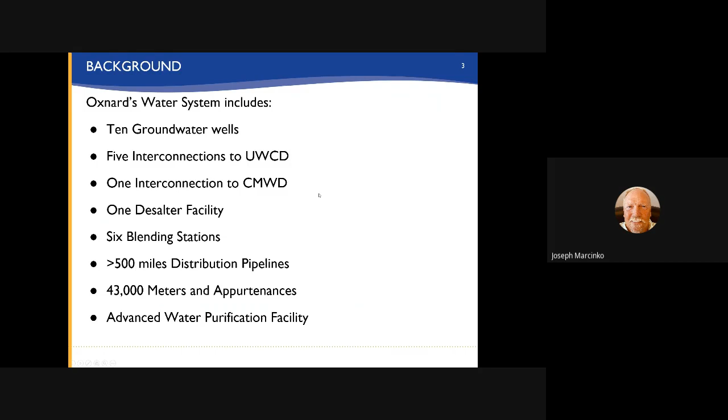Oxnard's potable water sources consist of Calleguas Municipal Water, imported surface water, City of Oxnard's own allocation to groundwater through the Fox Canyon Groundwater Management Agency, and groundwater purchase from United Water Conservation District. The Calleguas amount is about 30 to 40% of our annual supply. The city wells are about 20 to 30%, and United Water Conservation District consists of about 30 to 40% of our supply.

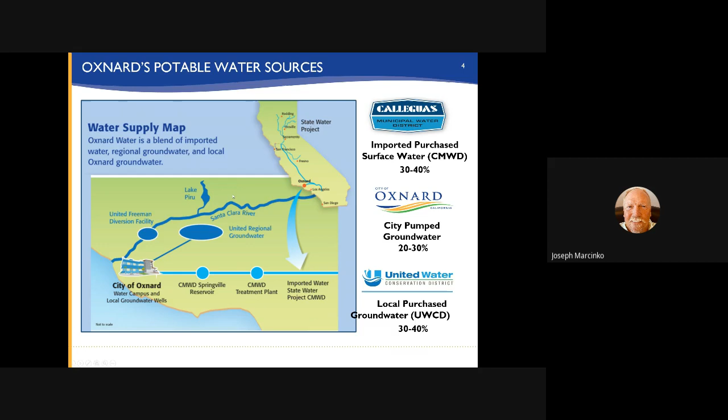Background: The Public Works and Transportation Committee in 2021 requested that the Public Works Department provide reports regarding water-related topics: the Water Division virtual tour, water sources and drought updates, cost of water, urban water management plan, and recycled water. This report provides a cost of service analysis, which is a component of Oxnard's future long-term plans for water.

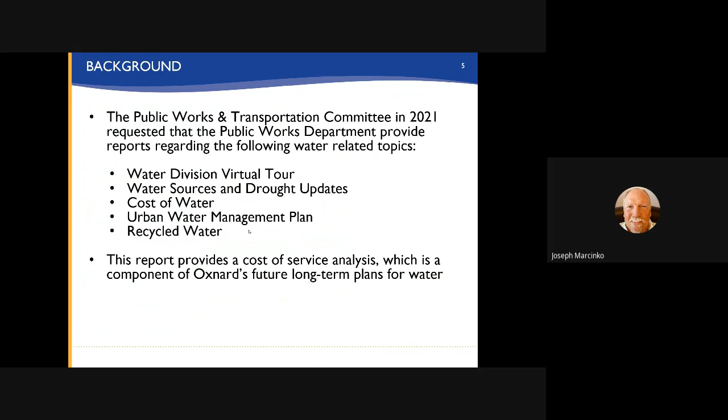Discussion: The water operating budget is funded from ratepayers' fees. Water revenues cover operations, maintenance, repairs, debt service, capital improvements, and cash reserves.

Budget forecast for fiscal year 2022 to 2023: the total revenues forecast are $68,127,319. The total expenditures are estimated to be very close to that, $68,008,769, leaving a net revenue of $118,550.

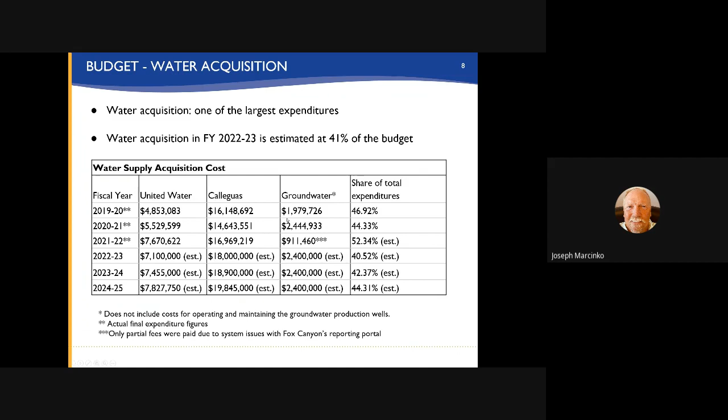The budget also includes electrical costs, which is a significant portion of our budget, and just like everything else, our electrical costs are estimated to go up. They were pretty consistent from fiscal years 2017 through 2021, but now they're starting to go up, with an increase estimated at about 14.6 cents per kilowatt hour for fiscal years 2021 and 2022.

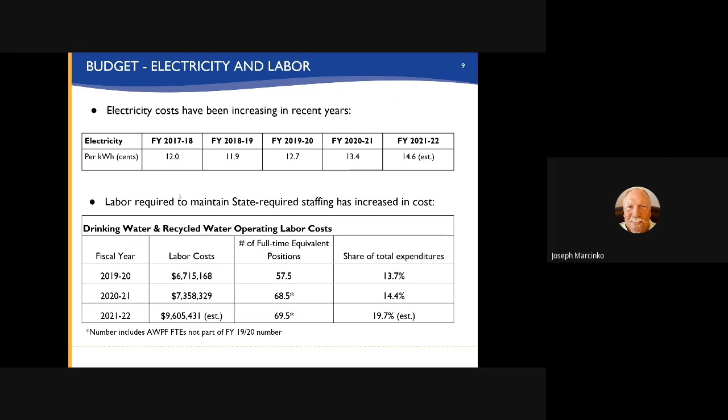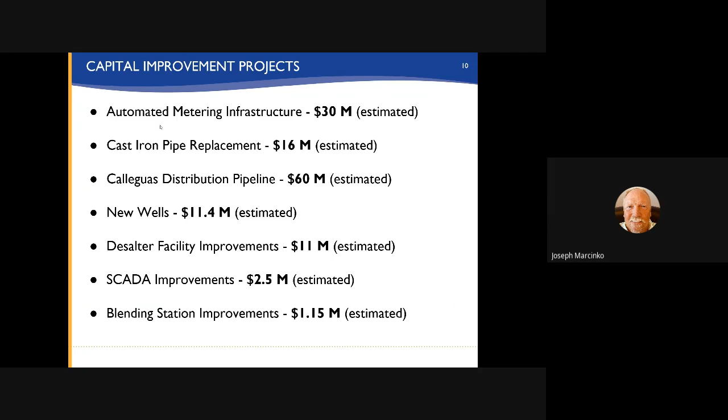New wells are estimated at $11.4 million. Desalter facility improvements are estimated at $11 million. SCADA improvements at $2.5 million. And lastly, blending station improvements at about $1.2 million.

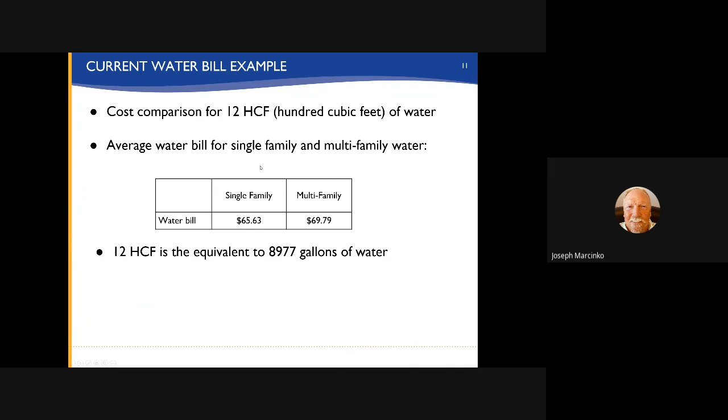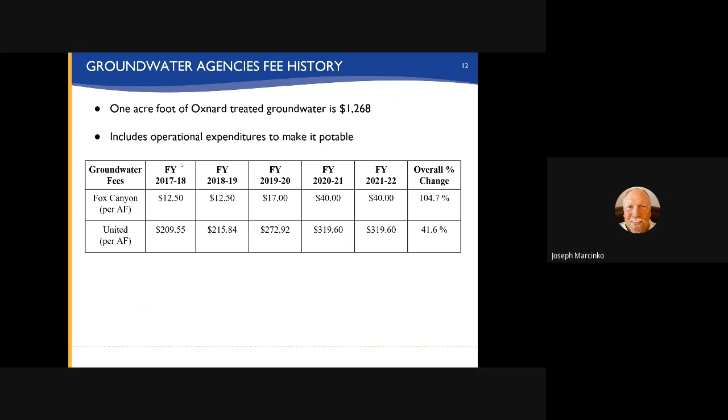The groundwater agency fee history shows groundwater agency fees are going up as well. One acre foot of Oxnard's treated groundwater is $1,268, which includes operational expenditures to make it potable. This table shows the groundwater fees from Fox Canyon and United Water Conservation District over fiscal years 2017 through 2022, and you can see how those prices have gone up significantly — that's one of our considerations in our operational expenditures.

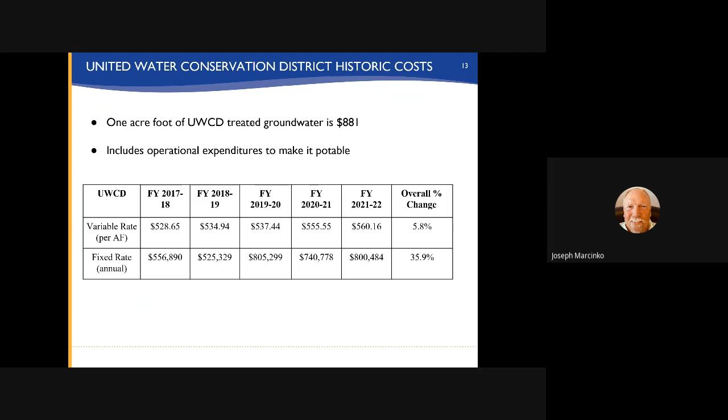United Water Conservation District's historic costs: 1 acre foot is approximately $881, including operational expenditures to make it potable. The table below again shows fiscal years 2017 through 2022 and the different charges with corresponding costs, which have also gone up significantly — another very important consideration that affects our cost of serving water significantly.

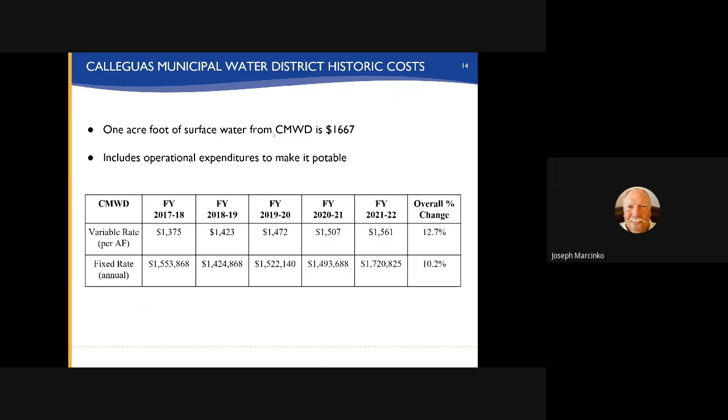Lastly, here we have Calleguas Municipal Water District historical costs. One acre foot of surface water from Calleguas Municipal Water District is $1,667, which includes operational expenditures to make it potable. This table again shows fiscal years 2017 through 2022, and you can see how those costs have increased steadily as well.

This is a table for water supply and demand projections. You can see that from 2025 through the estimated years of 2045, our estimated water sales and use is expected to go up, and we have to make sure we secure additional water to meet the needs we estimate we're going to have.

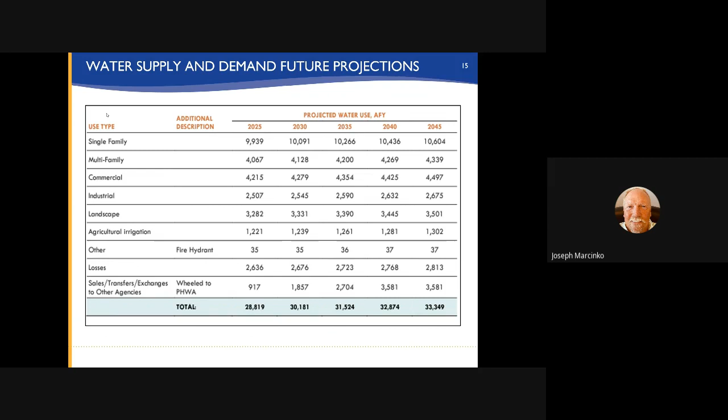This is a graph that shows the proportional makeup of the water supply and the estimations for the future, from the years 2014 all the way up to the estimated years of 2042. You can see how the different proportions have changed with the three sources: city groundwater, United groundwater, and Calleguas.

But that's not going to meet our future demands, so we need to factor in recycled water, using it for ASR, as well as taking recycled water that we've sold to the agricultural community, and we get credits for that, using those credits in future years in order to meet that demand.

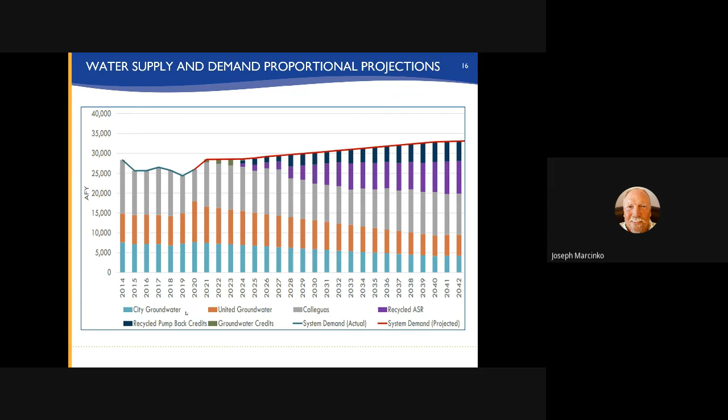This table shows Oxnard's groundwater basin's historic levels. You can see they're not in a good way. The 80,000 acre foot line is kind of the safe yield for the basin. From October 2013 for the most part, all the way through the present time, it's been in overdraft, which is what they call it when they're under that safe yield.

They had one spike in the 2018-2019 year, a good rain year then, but you can see this prolonged drought has significantly affected the groundwater levels in the area.

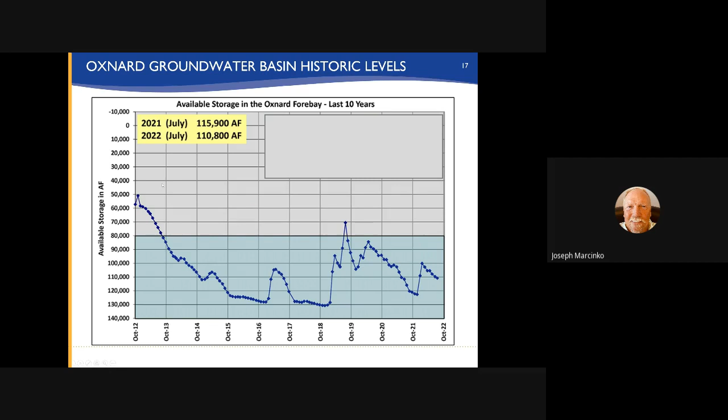For the Calleguas supply, as you probably know from all of our meetings and drought restrictions, available water supplies all around the state in California are bad. This slide represents the different reservoirs across the State Water Project and their current levels as of September 2022, and you can see that they're all very low as well.

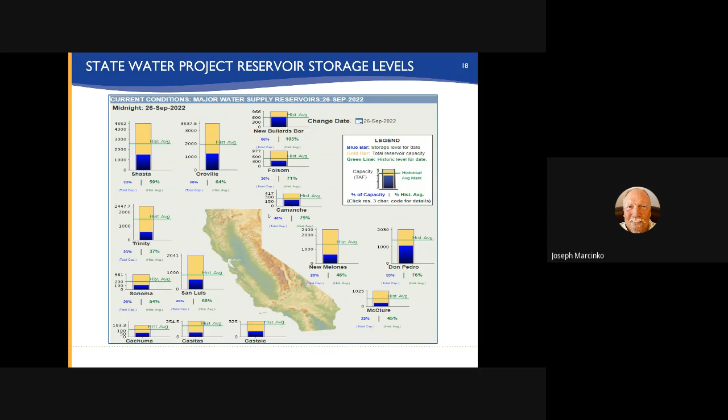So in order to look at our future, we ran a SWOT analysis. A SWOT analysis is strengths, weaknesses, opportunities, and threats. This table lists those different areas that are significant things we need to consider for future operations. Some of the strengths we have, especially now, is that we're very fortunate to have multiple water sources.

As one water source gets depleted, having multiple water sources is like having different financial accounts and different amounts of money in different banks, so you can pull out money if one investment isn't doing so well. We also have the GREAT program, taking recycled water and working towards making it potable in the future. We have a robust capital improvements program for replacing our infrastructure, an urban water management plan for managing water in the future, as well as a water shortage contingency plan for critical shortage levels.

Some of our weaknesses are the regulations in water, and the requirements constantly coming out. The regulatory timelines associated with those are usually very short.

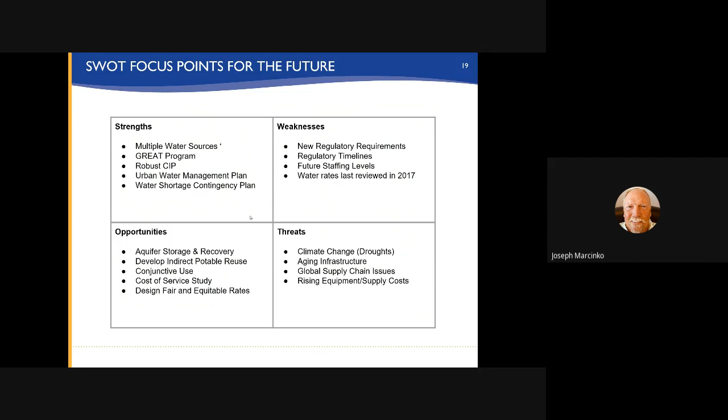There are global supply chain issues and rising equipment costs and supply costs that are a byproduct of the COVID-19 epidemic as well.

In conclusion, there are a lot of outside factors that continue to increase costs to provide water. However, Oxnard's Water Division is always committed to delivering safe and reliable water 24 hours a day and 365 days a year, implementing our 5-year capital improvement program so that we can maintain and replace our aging infrastructure, and utilizing recycled water as an additional water source in the future.

We're working hard to get that all set up. We're looking closely at our water budget to make sure it's properly funded and efficiently utilized. We're preparing to handle the effects of climate change and those challenges, and we're looking at securing a reliable and well-maintained water system and maintaining public health and safety for future generations.

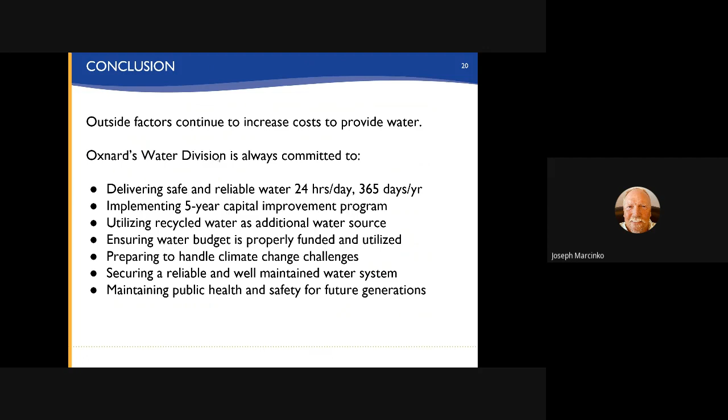There's no direct financial impact in receiving this report, and that concludes my presentation.